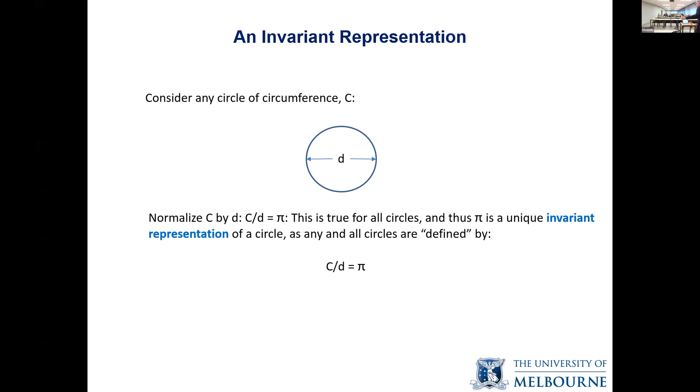Okay, so we'll start very simple here. So we're going to talk about invariant representations of the equations, but we'll start with a simple concept here of just a circle. So it has its two characteristic properties. There's a diameter and then a circumference. And if I take the circumference and I divide by the diameter, I get pi. And that's true for any circle. So that's an invariant representation of a circle. So pi is an invariant representation of a circle. You give me a circle and I'll give you pi as this relationship, and it holds for any and all circles. Okay, so that's basically the idea that underlies scaling in fluid mechanics.

So when we talk about scaling in fluid mechanics, we're really talking about invariant representations of the equations and then the solutions of those invariant representations. There's well-defined mathematical theory, Lie group theory, if you really want to get into the details on why or what underlies these scaling ideas.

What we're interested in as fluid dynamicists is being able to predict into parameter regimes that we can't access experimentally or numerically. The scaling problem allows us to do that if we can get the proper invariant representation and the proper normalizations, so they become invariant to changes in the governing parameters.

An important point is if the governing equation doesn't admit an invariant form—and that's a complicated question, because sometimes it's just that you can't find the invariant form—then there's no reason to expect it can be scaled. In other words, all scaled solutions come from equations that can be written in an invariant form.

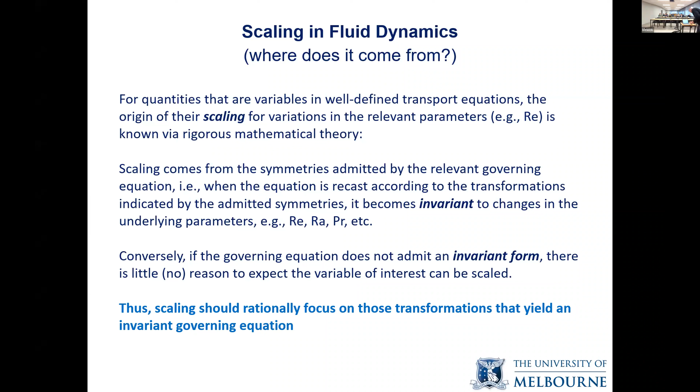Anybody who's done experiments is familiar with the empirical test. You have some velocity statistic or some statistic of the turbulent flow field, and you have some way to normalize it—you put a star on it once you non-dimensionalize using your parameters of interest. So this quantity is now normalized, say it's a profile with distance from the wall. If it doesn't change, then the empirical test says, okay, I've got something that's a candidate for an invariant representation of that variable.

Now, experimental data can never prove a scaling. It can prove the negative, but to really prove it, you have to come up with an invariant form of the equation and solve that equation. If you really want to mathematically prove it, you can give very strong evidence with empirical data, but that's beyond its scope.

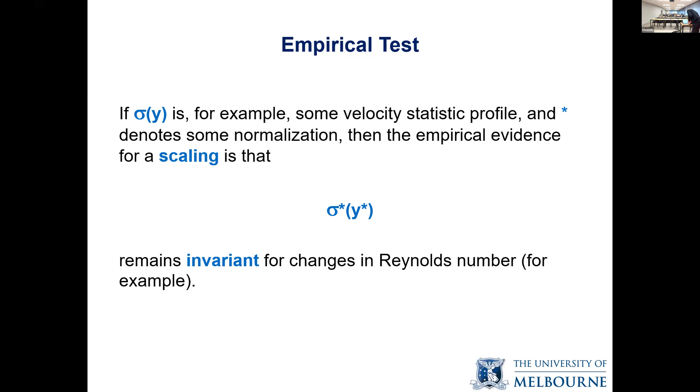Here's a nice example of an empirical test: laminar boundary layer data we took at different Reynolds numbers. Big C, well, the circumference, right? And then we represent it in the Blasius coordinates. So now you think pi, or C over D, right? And you get this invariant representation of the laminar boundary layer by normalizing it by these special variables.

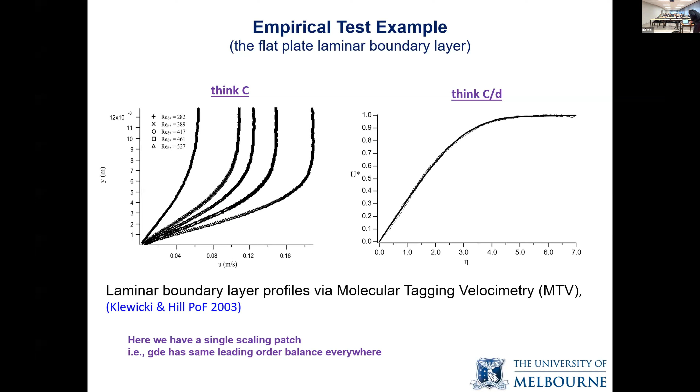This is a particularly interesting example because it has some relevance to what we're going to do with channel flow. If we look at the Blasius boundary layer solution—we have the Blasius boundary layer equation, put it into stream function form, apply boundary conditions, undergo a similarity transformation—you end up with a nonlinear ODE. You can't solve that in closed form, but you can integrate it using MATLAB, for example, and you get a universal curve, the one represented on that previous plot.

Okay, so that's all really good. Now, what does this represent—is that an exact equation? Flat plate, laminar boundary layer—is that an exact equation? I know I've got some graduate students in here. So is it exact? What is this equation? It's the Blasius boundary layer equation, right? So exact or not exact?

We get a bunch of cowards in the room here, nobody wants to commit. This is an approximate equation—it's the asymptotic representation, the high Reynolds number asymptotic representation of the Navier-Stokes equation. If you take the Navier-Stokes equations for a thin shear layer along the wall and let the Reynolds number run to infinity, the Navier-Stokes equations approach this equation. This has relevance to what I'm going to be talking about today: exact solutions to an approximate, leading-order representation of the equations, and that leading-order representation becomes better as the Reynolds number goes to infinity.

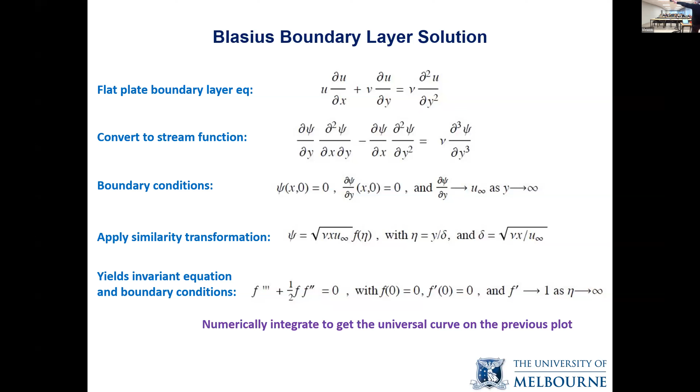That's different from other representations you might see of a boundary layer using analytical or semi-analytical methods, where they might use matched asymptotics—that's an approximate method for an approximate equation. I'm going to be talking about an exact solution to an approximate equation, and that approximate equation gets better as you crank up the Reynolds number.

So what are we interested in? We're going to focus on the inertial sublayer in physical space, but some of the solutions will run all the way to the channel centerline, and we'll be considering channel flow. The inertial sublayer is the region far enough from the wall to be inertial, but interior to the flow, so it minimally sees boundary condition effects. As the Reynolds number gets large, that insulation from boundary effects gets better and better. This is like the inertial layer in spectral space for people who work in that area. Here's the nomenclature we'll be using.

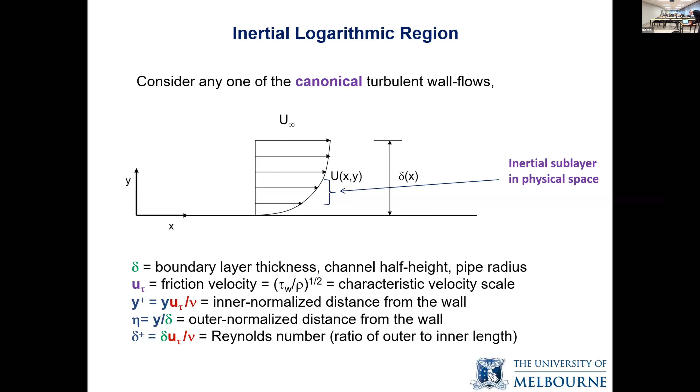Okay, so let's talk about how this similarity solution is constructed. I'm not going to go into all the mathematical details, but hopefully I'll give you enough so you get a flavor for it. Okay, so here's the problem: turbulent channel flow.

So it's the typical turbulent channel flow, infinite length, infinite width, driven by a pressure gradient. This is the spatially uniform pressure force. And here's the mean equation. So if we take the Reynolds average Navier-Stokes equations and simplify it for this flow, you've probably all seen this equation before. We've got the mean effect of the turbulent inertia, the Reynolds stress gradient, equal to a pressure force and a viscous force. That's all very straightforward.

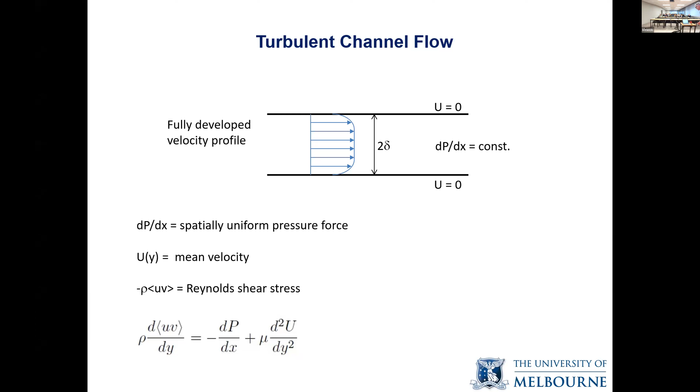Okay, so if we go ahead and normalize this by our inner variables, so u tau and nu, I had those up previously, then we'll call those the plus variables. So we have our viscous force, our turbulent inertia, that's the gradient of the Reynolds stress, and then you've got your pressure gradient, and I'm going to associate that with a small parameter epsilon squared. So now there's only 3 terms in this equation. Unfortunately, there's 2 unknowns. And that's the crux of the problem we're dealing with here today.

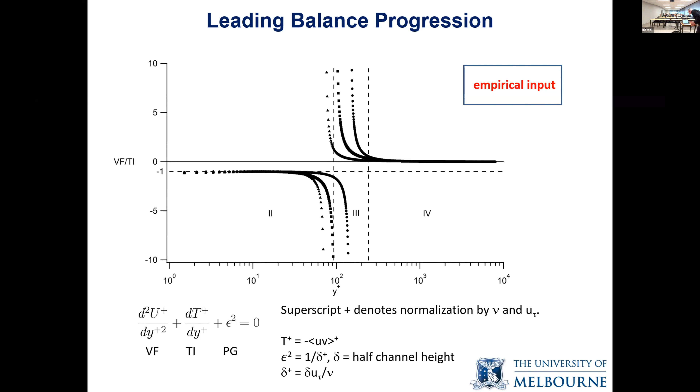Okay, so how do we do this? Well, if we go ahead and plot the viscous force and the turbulent inertia and then the pressure gradient, and this is a pretty low Reynolds number, because if I did it at high Reynolds number, everything would be really scrunched down here on the axis, as we move across layer 3 and into layer 4. So what we do is we construct a new coordinate system, and that coordinate system keys on the monotonically decreasing portion of this turbulent inertia term.

Okay, and it's basically a coordinate transformation. We're going to use it as a surrogate, or we're going to use the properties of this to renormalize the distance from the wall. That's probably one way to think about it. And the way the construction works is that you can identify any point on this curve, and these positions are called beta. So there's some value of this on this curve. It's important to do it on the monotonically decreasing part. Otherwise, you wouldn't have a one-to-one transformation between the y-axis and this curve.

And for each one of these positions, there's going to be a layer, like layer 3 is for the overall flow, where there's a balance exchange, where the leading order balance goes from viscous to inertial, and that happens as a function of scale. So what we're going to do is we're going to be able to, and that happens over a finite width, just like across layer 3. So you can pick any point on this curve, and so there'll be a layer there.

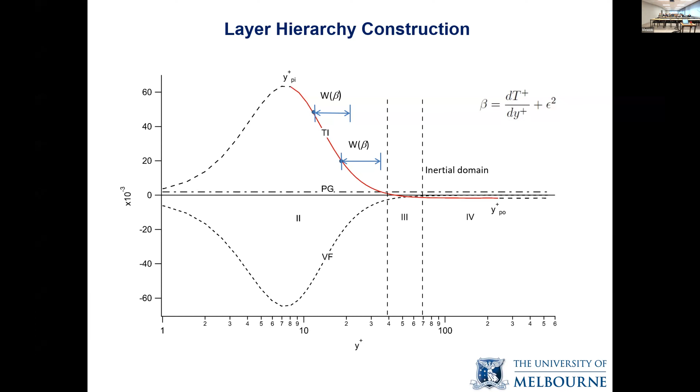Okay, so how do we construct this invariant solution on each one of these layers? Well, you can rewrite in terms of coordinates where y beta is the y plus position at some point on that curve. If you put in this finite transformation, I won't go through all those details, and you plug it in here, you can get an invariant form of the equation where all terms are order 1.

And this has been verified. You can actually look at the magnitudes of the different derivatives and look at the bounds. And this is valid on each one of those layers, subject to these stretching parameters having this representation. Okay, if those are satisfied.

So you notice we got a floating parameter here, lambda, and that's associated with velocity scale. This is important, and this is where we're going to limit the scope of the analysis. If we limit the scope of the analysis to lambda equal 1, that says that u tau is the characteristic velocity, and that leads to a logarithmic analytical solution for this equation.

It turns out we've looked at some pressure gradient flows. I won't talk about that today. And lambda could be variable because you could have multiple velocity scales. I can revisit this. This is actually testable, and I'll comment on this at the end, that it's true that u tau is the only velocity scale for channel flow.

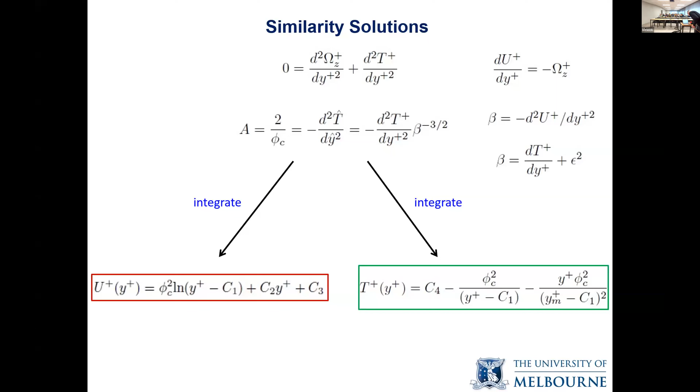Okay, so the last thing I'll talk about before we start looking at some specific properties of these solutions is that, although it's a continuous hierarchy, to leading order that invariant form is valid over a finite domain. So you pick a spot, there's a length scale associated with it, and the invariant form is valid over that finite domain, so you can create a discrete representation.

So you get some distance from the wall y, and then you add the w associated with it, so that's the w associated with that y, and it gets you to the next y. Okay, so you just stack them up.

And so this is data from Yamamoto and Tsuji, and these are actual w's, picked off that graph I had before, and these are just represented. So this is the beta curve, and these are the w's associated with those points.

And I'm just saying, instead of using a continuous representation, I can write an invariant form over that width, and then I can stack it onto the next one and write it over that one, and allow you to do some algebraic things, rather than have to deal with continuous functions all the time.

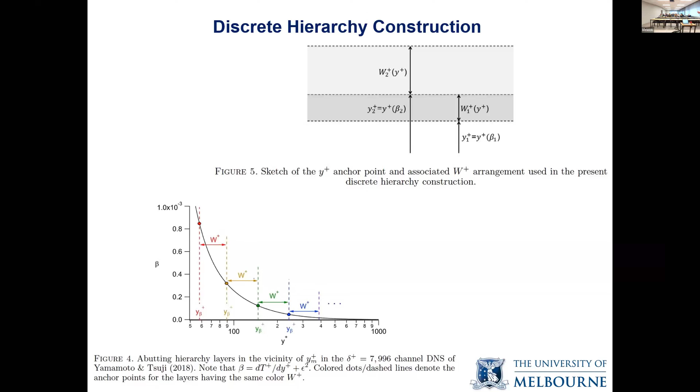Okay, so let's look at some of the properties. The form is true to leading order, you said, to leading order.

Yeah. So the representation, because remember, we're looking at the scaling of the mean momentum equation as the viscous term transitions from dominant order to subdominant order, but that viscous term is still non-zero, right? But as the Reynolds number goes to infinity, that level of subdominance becomes more and more, and so that's how this solution is refined. The inertial layer truly becomes fully inertial. There's a diminishing effect of any sort of remnant viscous state.

By the way, the reason it's so difficult, or the challenge of coming up with a good argument and good solution for the log law, is because the logarithmic law happens on a domain where the viscous term in the equation is subdominant. So you're actually looking for a second order solution, right? It's not in a region where it's a dominant term in the dynamics. That's why it's been so elusive.

Well, we know it decays with Reynolds number, because if you take the derivative of this, then C2 must go to 0, right, as the Reynolds number goes to infinity, otherwise it would blow up.

The issue is, does it go to 0 at finite Reynolds number? It needs to decay faster than 1 over Reynolds number, and it actually decays something like Reynolds number to the -2. So it decays, and this term goes to 0 at finite Reynolds number.

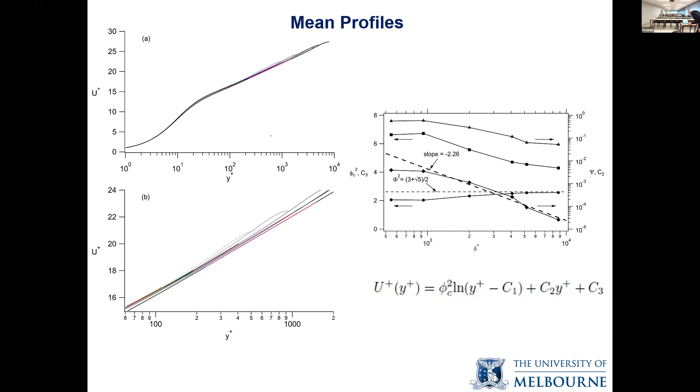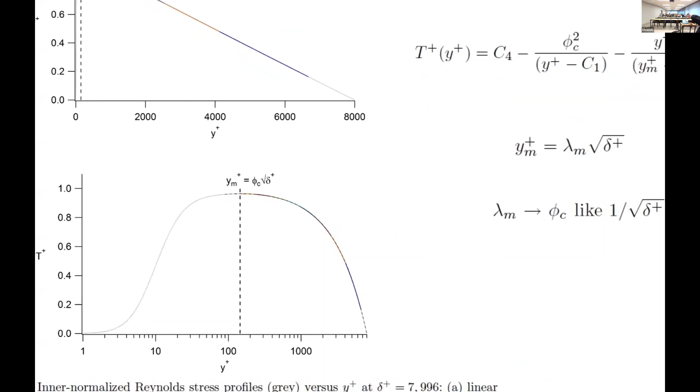Here's the Reynolds stress profiles and the Reynolds stress solution I want to impress. Here's the linear representation, and what I've done is stacked up some layers starting at the peak. You can see there's that little yellow one, and then they get bigger and bigger. These are the W layers associated with that. And then here in the bottom, I represent the actual DNS solution.

The other thing is, if you do a bit of analysis of this equation, you can show that the peak in the Reynolds stress goes like some constant times the square root of Reynolds number. And you can actually show that this constant approaches phi sub c like 1 over square root Reynolds number. So as the Reynolds number goes to infinity, it becomes equal to phi sub c.

The phi sub c value that I'll give you later on is—so this is a DNS, and out near the peak in the Reynolds stress, the spacing in the DNS grid is still less than a viscous unit. So it's like 0.94, and in the data they list there's 2 peak values. The position of the peak here is between those 2 peak values, and I'll give you a representation of the error associated with that. So, I should admit, if I take other recent DNS, it's not that perfect.

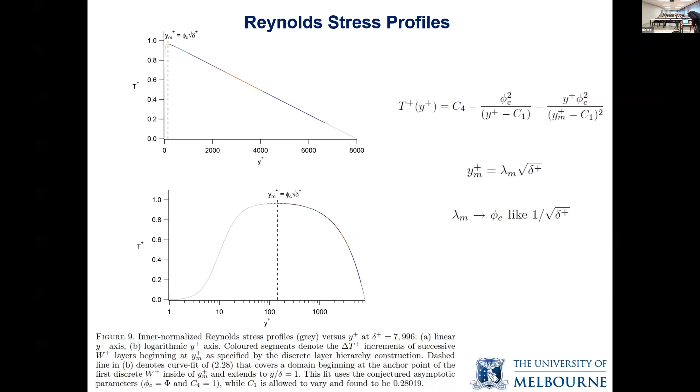That to me just shows there's still very small differences between DNS. The other thing you can do is an analysis that says the deviation of the maximum value of the Reynolds stress from 1, which is the asymptotic value—here I show a few different normalizations. The thing you'll notice is that the data point at Reynolds number of 4,000 from Yamamoto and Tsuji seems a little low relative to the other ones. The black line is if I fit them all, freely fit to the equation here, some power law, which we know it must be.

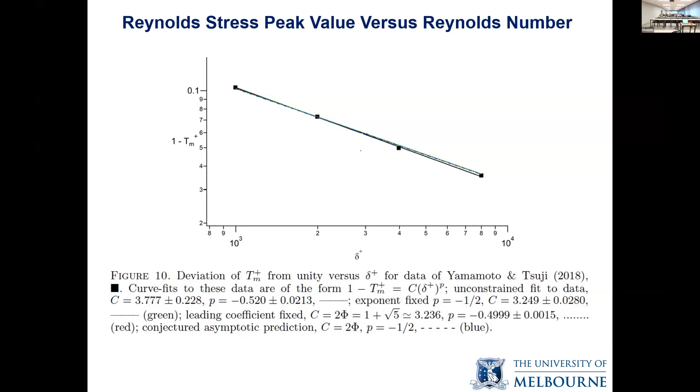And the theoretical prediction is that it should be 2 phi for the constant and 1/2 for the exponent. If we set the constant equal to the conjectured asymptotic value of 2 phi, then we get a value of 0.4999. The unconstrained fit has a value for the exponent of about 0.52. The theoretical value, if we put it there at 1/2, then we get another coefficient. But you can see they're all very close.

The other thing the theory allows you to do is objectively estimate the outer edge of the log layer or the inertial layer, and there's a couple ways to do this. Basically you want to measure the curvature of that Reynolds stress profile, as Christos just mentioned, because when the curvature stops, at a minimum you can't assess the log layer, since it depends on the curvature of the Reynolds stress in this theory. The reason you get logarithmic behavior has to do with that curvature of the Reynolds stress, because it's that curvature that leads to the W distribution having a linear dependence with distance from the wall.

The other way to do that is you can just look at the ratio of the delta T across any layer with distance from the wall.

Turns out the delta U on any layer is constant, and it's a function of phi. Whereas this is not constant, but when you get out to where you can't measure the curvature anymore, it becomes equal to phi.

And so if we look at these data, and I've looked at a few other data, it's about at 0.125 delta plus. It may actually go up further. It's just that you get into the noise of the data, right?

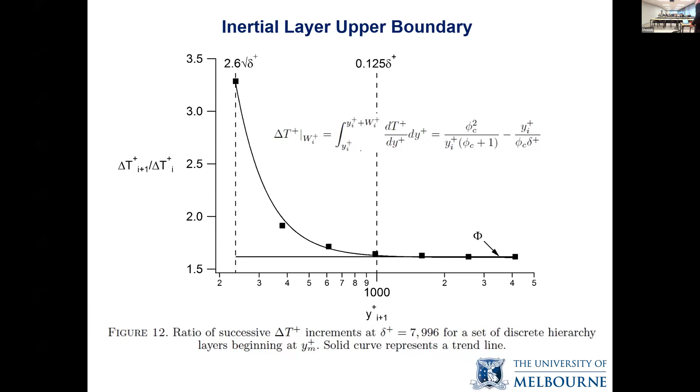Okay, so the last thing I wanted to talk about is estimating this key parameter, phi sub c, which is really at the heart of the similarity transformation.

There's a number of ways you can do this. I already talked about one, right? You could just go ahead and look at the position of the maximum, plot it versus square root Reynolds number, and measure the coefficient out front. But that's not a very reliable thing because you got one data point that tells you, right? That's not very good.

You can look at a modified indicator function. This is sort of the classical way to determine logarithmic dependence. And then we also have the profiles to look at, right? So you can fit these profiles over a considerable amount of data points and make an assessment of that.

We'll look a little bit at this, but then we'll actually look at some fundamental definitions, right? So if it's a similarity solution and I can get U and I can get T, or the Reynolds stress, then I should be able to use the U profile to get phi, and I should also be able to use the Reynolds stress profile to independently get phi. Okay, and we'll do that as well.

But before we do that, let's go ahead and take a look at some data that's out there. So these are just for pipe and channel flow. The reason I throw pipe in there is that you can write the pipe flow equation to look exactly like the channel flow equation. Well, they may approach their asymptotic condition differently, but you can write them exactly the same.

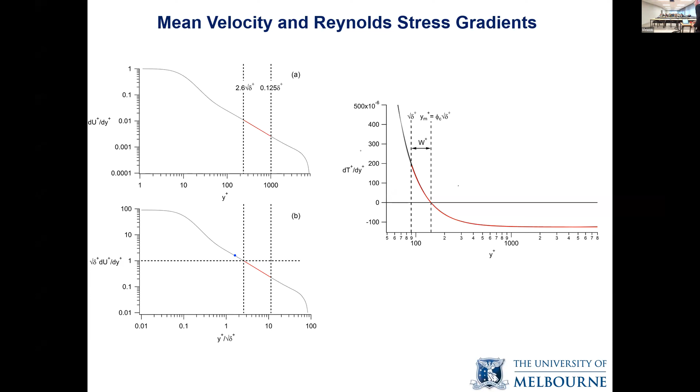Okay, let's talk about the modified indicator function. So the theory that we have here says rather than du plus dy plus equals 1 over kappa y plus, there's some constants in here, and that's a problem. And I'll show you how this is.

And so if you wanted to do the indicator function, you'd represent it this way. And you know, whenever you're trying to evaluate something, if you got adjustable constants, well, you can make it work. But then the problem is you got these constants.

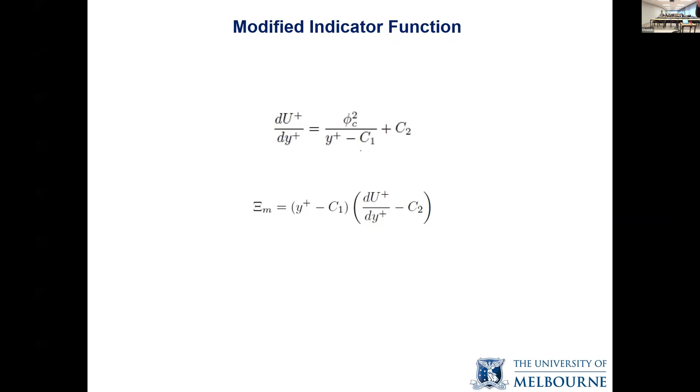Rationally, the estimate for kappa, or phi, is somewhere between those two estimates. I think the thing I want to point out here is that this indicator function is very sensitive to those constants. So it would be better to make an evaluation that doesn't depend on those constants. That gets us to the fundamental definition, right? No constants, we can just go ahead and measure it.

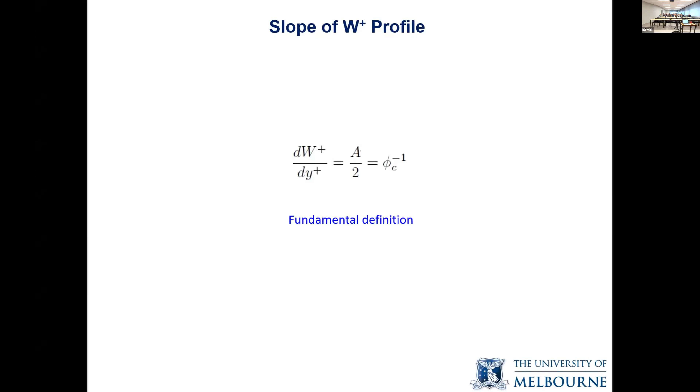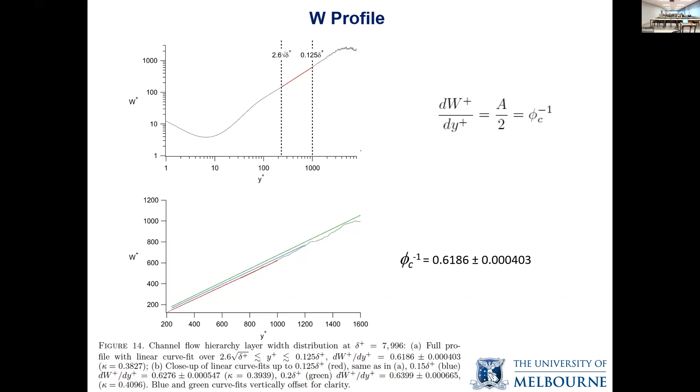So this is the assessment of how good that assumption was. How good is the assumption? The assumption, the linearity of this, is the assumption. If this is linear, then the primary assumption that I stated, that function A, or phi sub c, becomes a constant as the Reynolds number goes to infinity, holds to less than parts per 1,000.

The last thing I'll show, maybe you haven't seen before, is that if you take the T plus profile and write it in its asymptotic form, that last term simplifies and the constant drops out of this term, because at infinite Reynolds number, some little constant isn't going to make any difference.

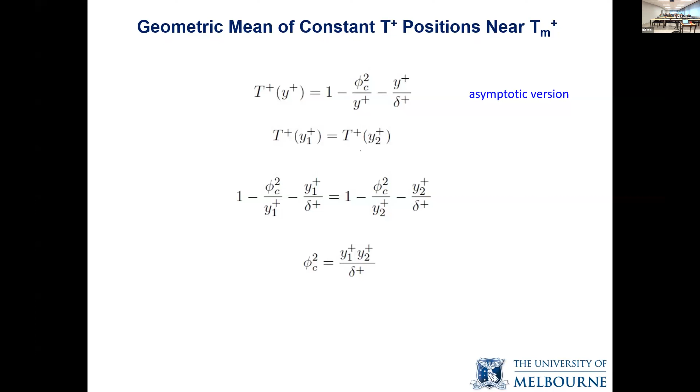Then what the theory says is that T plus, once you have this expression, you could say T plus on one side of the peak of the Reynolds stress is equal to T plus on the other side of the Reynolds stress, and you can set those two equations equal to each other. Then you can write an expression for phi sub c, solving for that. So we can just go ahead and do that.

Here's a blow up of the Reynolds stress profile in the vicinity of the peak. I'm going to pick a point here, at the same T value. I take the geometric mean of those and get that point there. You can see it's not quite on the peak, it's a little bit shifted.

And I can do that for different points here. I did it for 8 points, and if you take the average of them, you get a value of phi sub c equal to 1.6195. So 1 over that is close to that other value I got from the W. This is the independent way to do it using the Reynolds stress profile.

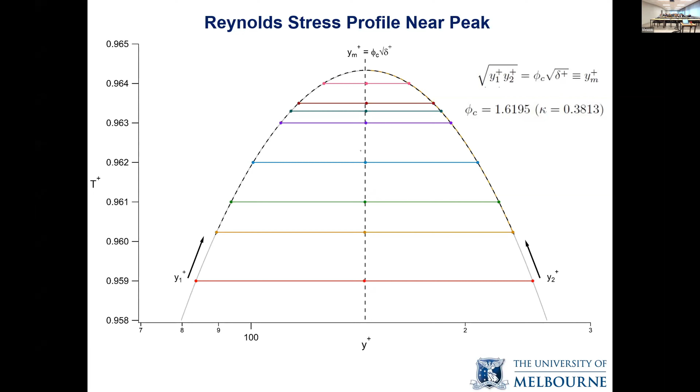So that's a summary of what we find in terms of phi sub c being, number one, a constant, and actually very close to the analytical conjecture that I'm going to talk about a little bit here at the end.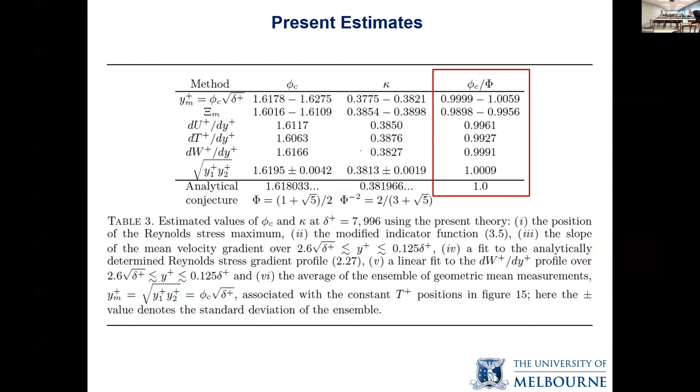Okay, so let's talk about this geometric structure. We'll go back to the discrete representation. So the discrete representation says I'm going to go some y distance, and then I'm going to tack on a w—there's the anchor point, and I get to the next y.

Well, if you look at the construction of the golden ratio, you have some distance, and you add it to another one, and you get the total. And then if you add other constraints, you say that A over B is equal to C over the larger part, A, and the part I already talked about, A plus B is equal to C—then that's exactly true. That's what's required of the golden ratio.

In this case, we've got y over w is equal to phi sub c, and we've got y plus w is equal to y i plus 1. On the other hand, it's not exactly—I've gone around and around, I can't quite get this right. But the best you can show is this, as far as I know. And so if this quantity approaches 1, then phi sub c is equal to

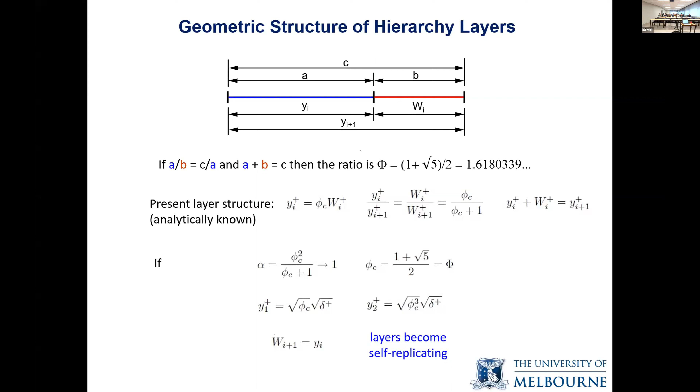Okay, the last thing I'll just mention—well, let me go back. So there's a couple ways you can sort of hone in on how this construction, how the layers construction, connects to the Reynolds stress distribution. I'll just return to that really quick. So one of the things is,

in the analysis, you can write an expression for y1 in terms of some phi sub c that you don't know. And then the question is what is the y1 that falls on the layer that leads to an integer number of layers spanning the distance between two points on this curve, or one point on this curve. So you can do that for y1, and you can get an effective phi, and you can also write an expression for y2 and get an effective phi.

Now you start going up the curve here, and you pick a point here, and this says, well, the maximum, according to this prediction—or the formula you get for that's based upon y1—you'll get a prediction for the peak, and a prediction for the other part of the curve. So now you can start moving up this, and if you move up, these points move: this one moves toward the center, this one moves toward this side, and as we move up, you get different values of phi associated with that.

And when you get to phi equals the golden ratio, there's the starting point for the circle—its prediction for the peak, which is pretty much right on. And you can see it's slightly off for the other side. So if it was exactly that...

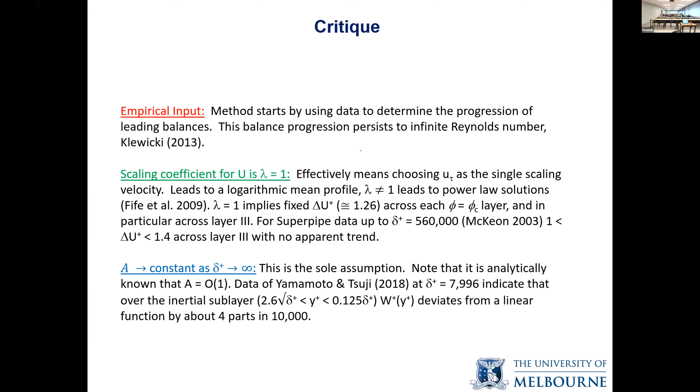And then the last one is that A approaches a constant as delta plus approaches infinity. That's equivalent to the slope of that W profile approaching a constant. According to the Yamamoto and Tsuji data, that deviates from a linear function by about 4 parts in 10,000.

Pipe flow yields the same results because you can write the equations the same way. The wall curvature does throw into question whether they approach their asymptotic state at the same rate. For the zero pressure gradient boundary layer, it has a mean inertia term rather than the pressure gradient term, and so the shape - actually the Reynolds stress profile - is quite different out there.

I had a student, Caleb Morrill-Winter, who did some analysis of this using high Reynolds number boundary layer data. He was able to show that the MI term is shape preserving and scales with delta. You can then go through a scenario where you transform this MI term, and show that it has the same similarity structure, but maybe with a slightly different position, slightly shifted outward for layer 3.

So the summary is: the solutions to the channel flow RANS equation exhibit nearly exact agreement with the DNS. The key assumption of the present approach is satisfied within less than 0.1% at that Reynolds number. The logarithmic profile is shown to occur because of linear variation of the curvature of the Reynolds stress profile. The inner and outer boundaries are well defined. The properties of the asymptotic profile are shown to analytically connect to the underlying layer hierarchy.

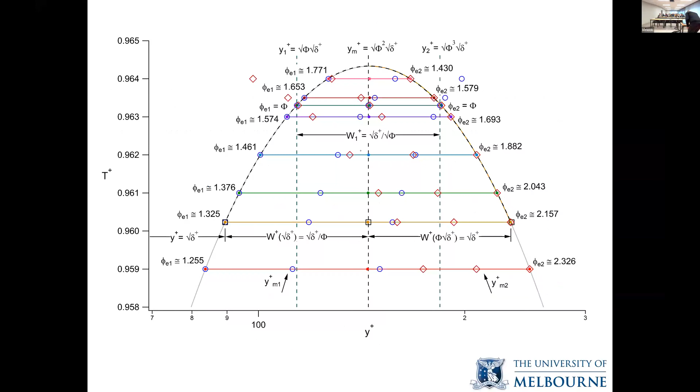If you look at this, the main differences I saw were in the shape of the Reynolds stress profile in the vicinity of the peak. On the representation I gave you there, where you plot it on a logarithmic or semi-logarithmic scale, it's a parabola.

And that's a theoretical prediction. Some of them, it's not quite parabolic. On the other hand, if you look at something like the W profile, where I've used Pirozzoli, that was in a pipe, Hoyas, that's a pretty short box. So the W profile seems pretty good in terms of estimating it.

It's just that Reynolds stress to compute, and I have lots of experience, Reynolds stress to measure is just very difficult. And it's noticeably how much smoother it is.

So if I plot the second derivative of velocity and compare it with one over the Reynolds number plus the derivative of the Reynolds stress, that second derivative, they have to be equal, right? That's the momentum equation. The Reynolds stress one is noticeably more noisy.

Some of it has to do with convergence, the noise part. The shape, I think, probably has to do with the specific implementation of the grid. But there may be something I haven't been able to find that needs to be factored into the analysis to take into account these differences.